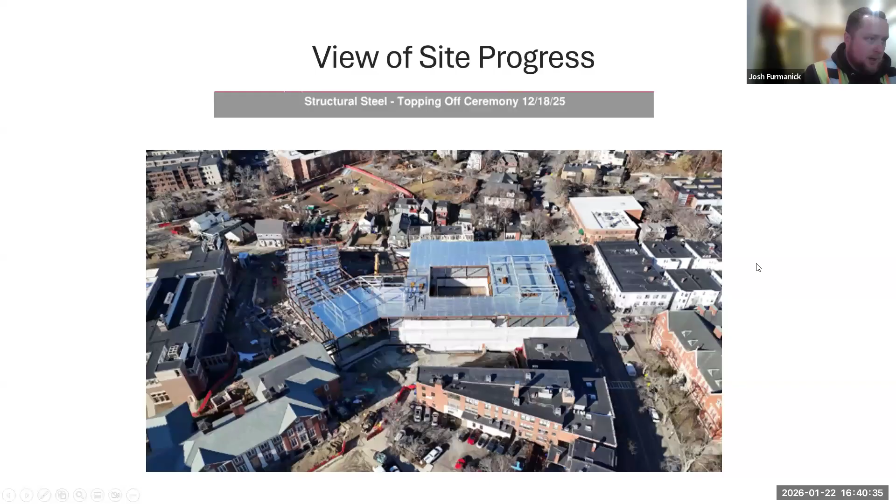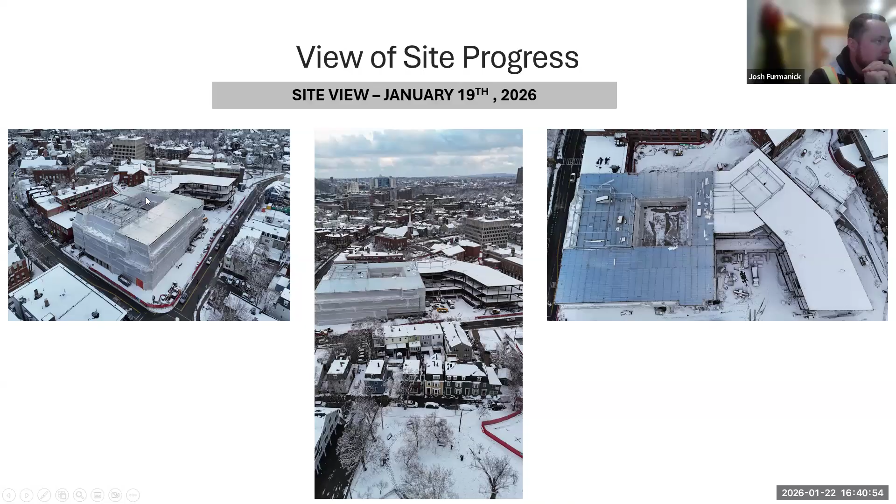Going through some photos here. Just an overall site view. Building A, that building right there with the Galvy roof. And then obviously building B's the snowy side where we got no heat right now. Left side's got heat wrapped in there. So that's kind of the overall view.

This is just a view from our office, showing progress from December to January, just tarped in the building now, pumping heat in there, which will help with all of our final slab placement tomorrow, level 2 courtyard, and then also spray fireproofing. We need heat in there for that.

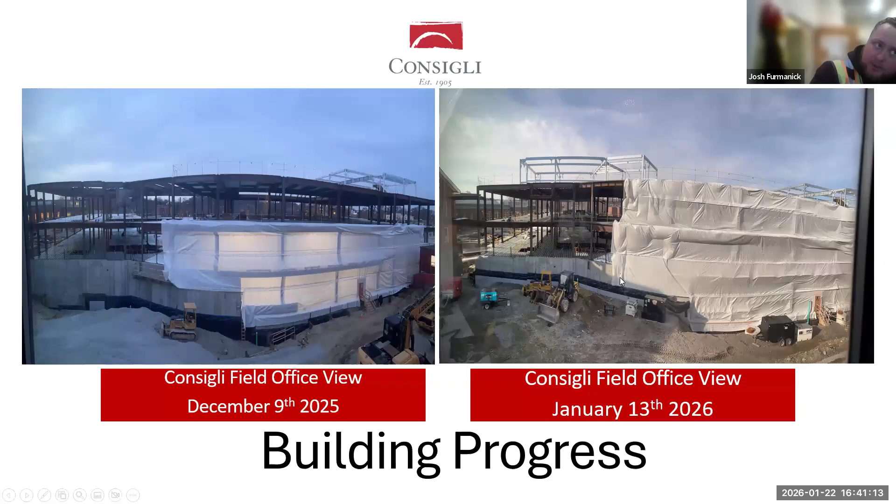View from Harvard Street, looking over at the front side of the building. And then this is just a level 2 slab placement.

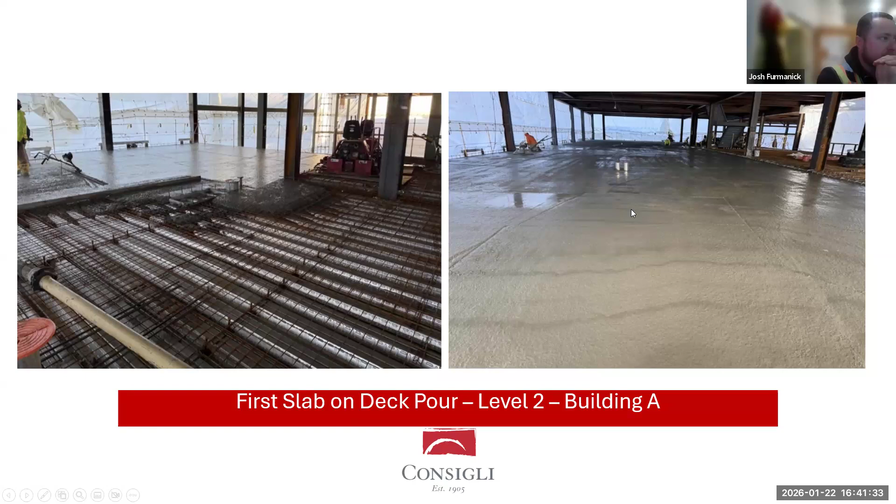That is actually a lower slab. We get a topping slab on that, but that's one of the slab placements.

And then just the library loading dock. And that'll be the future, or that is the green ramp wall on the other side. That'll be where we get sidewalks going up to connect to the backside of the historic building.

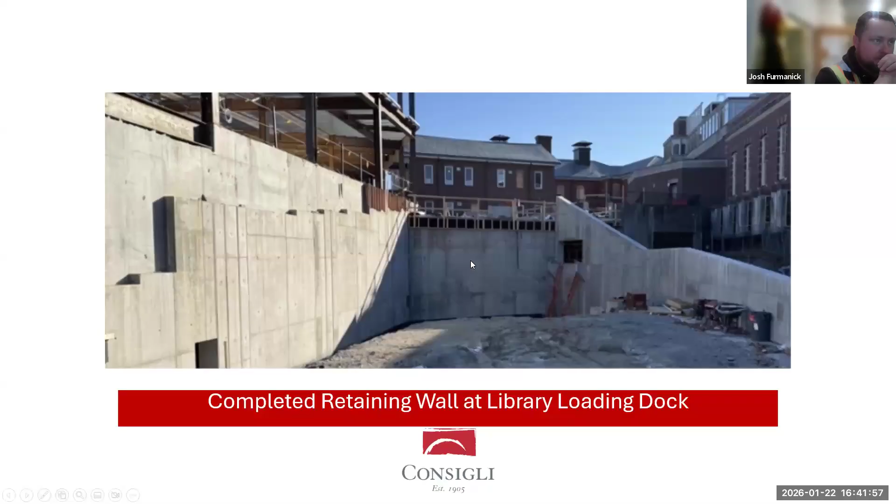Some underground progress down here, just underground conduits. Those are all going underground, coming out of the main electric room, heading over there, and then going up. So just progress of all the underground work.

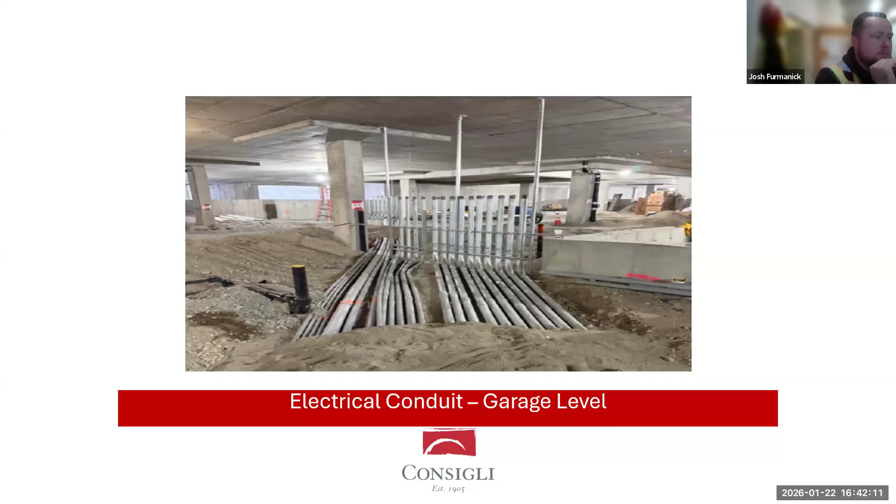And then this is the basement of the historic building, all the sub-slab drainage, which is installed now. And then that is just going to be trench infills with concrete.

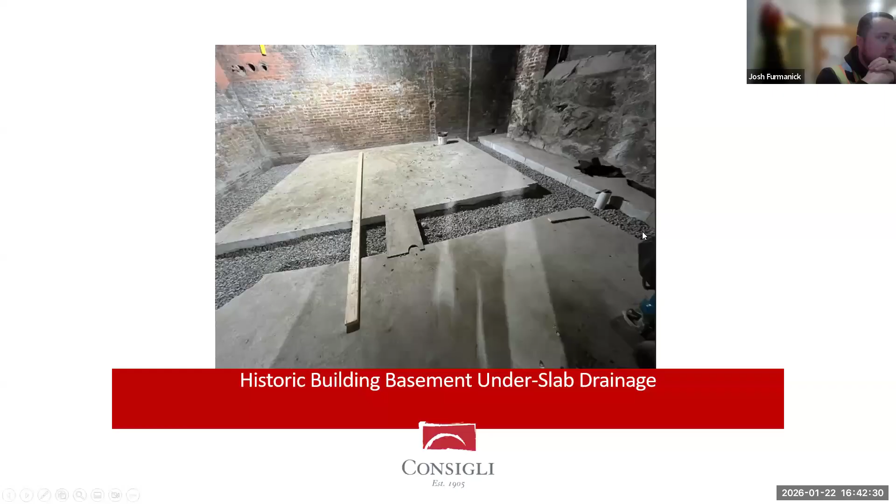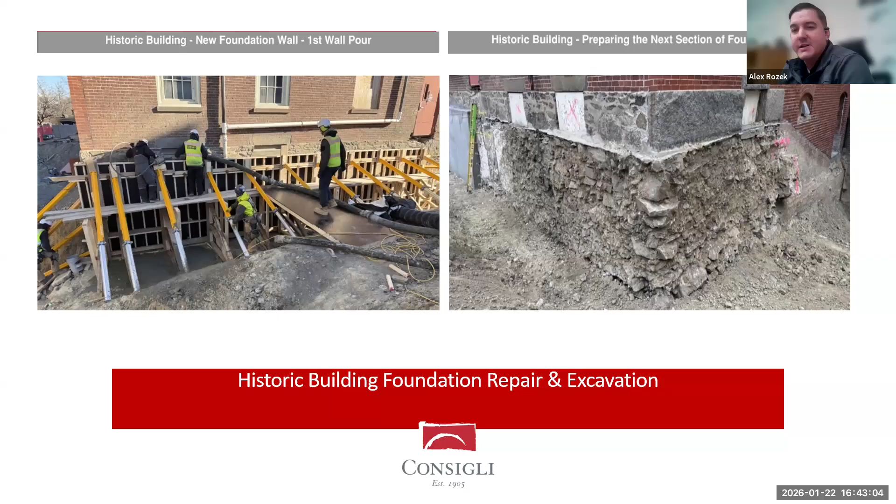With this next slide, we're going to take you through the overall process from after demo here to kind of where we are now. Just a quick little time lapse, so we feel it's nice to show you how far the project has come and the overall progress so far.

Every time I see that, Alex, I think we need a song in the background. Yeah, there is a song, I don't know why it doesn't come through the PowerPoint. Maybe we can take requests in the chat, if there's a particular one people like. We can have AI generate us a new one.

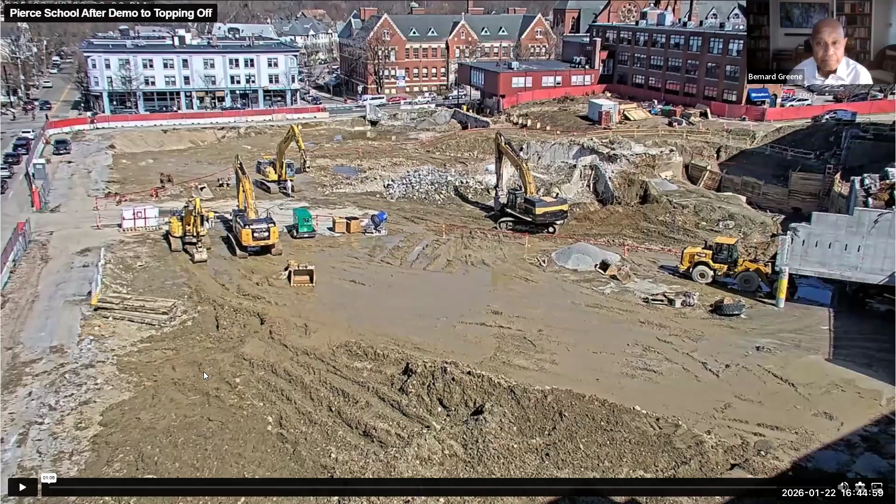Okay, is anyone going to talk about quality? What is that? And are you taking the screen back, or was the— Consigli, do you guys, I mean, I talked a little bit about it, I assume it's about quality of building. We can talk a little bit about that, Bernard.

Yeah, despite all the quality control programs that Consigli has, we have a third-party inspector. It's required, right? This is controlled construction, but we have a third-party inspection testing the concrete strength, the rebar, the steel welds, and the masonry. We have a nearly full-time quality control person looking after the geothermal installation. It's a very delicate installation, if you will. You've got to make sure it's right before you backfill everything.

Additional to that, all the design team people do monthly walkthroughs. They do reports, and if they see deficiencies, they bring them up. But before we even get to all of that, I know Consigli also has a pretty extensive quality program.

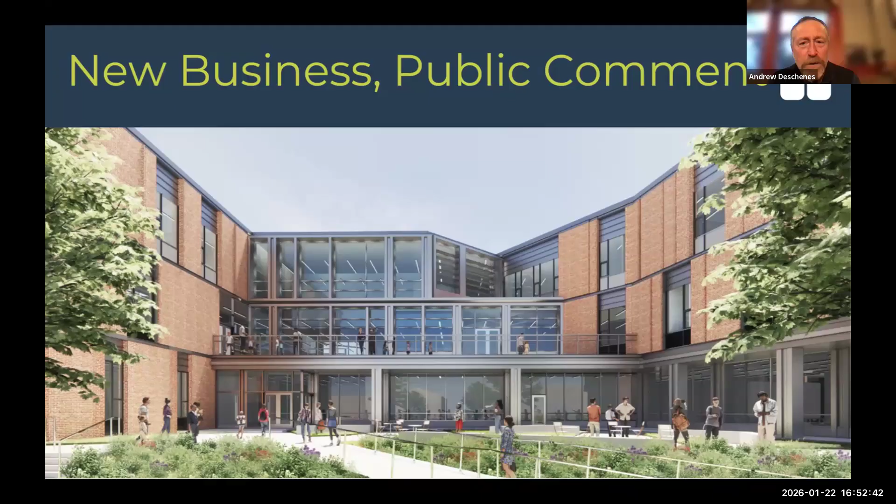So Bernard, I believe that brings us to new business and any public comment. Yes, any new business? Okay, Hey, Andy.

I'm sorry, I got one just as a little bit of an improvise, but you want to talk a little bit about student engagement? We had Timothy Hintz reach out to us.

Sure. Tim had reached out and asked — he said they've got some students that are very interested in the construction project and what builders do on a daily basis. I guess they have a little video section of the morning announcements that they can play for everybody. So he's going to come over probably on Monday if the weather works for us, and Alex and I are going to do a little video recording of whatever comes up — questions and a little Q&A to help the kids understand what goes on the construction site and what construction workers do every day.

Wow, that's good. Yeah, as a former Pierce School alumni, I'm happy to do it.

Great. Let them see what you can achieve. And yeah, students will learn a lot, and it'll be good information that they'll find very interesting.

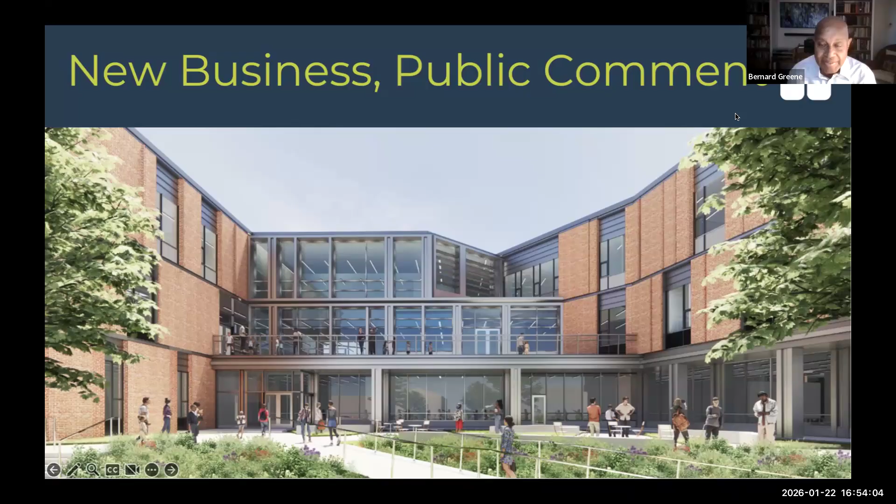Okay, anything else before we go to public comment? I think that's all we have, Bernard.